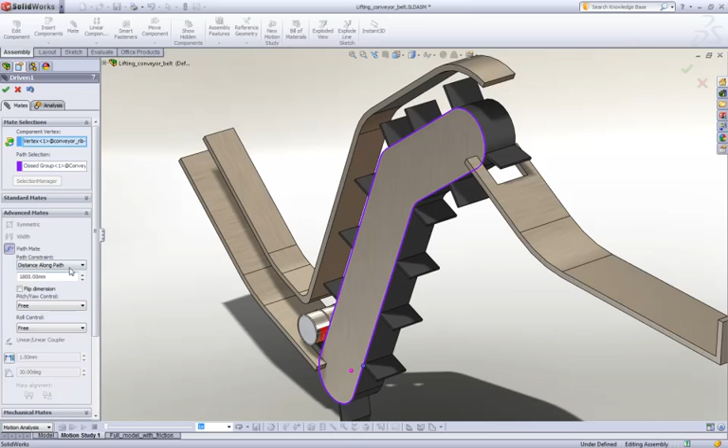New for Motion in 2011 is the ability to apply a motor to a pathmate. When we define a pathmate, we just use the distance along a path or percentage distance, and then we can drive that value using the motor. It's a very straightforward process. When you go to the motor option, you'll see you now have the pathmate option, and just select the mate that you want to drive.

In this instance, what we've done is we've applied a motor to every one of the ribs in this conveyor belt, so that we can then drive it around like a conveyor. And it's useful for other applications as well, such as overhead crane systems, to emulate chain type conveyors, or even things like roller coasters. So it's a very powerful tool, and it gets around the limitation of not being able to enforce a motor in more than one direction. So let's take a look at how this works.

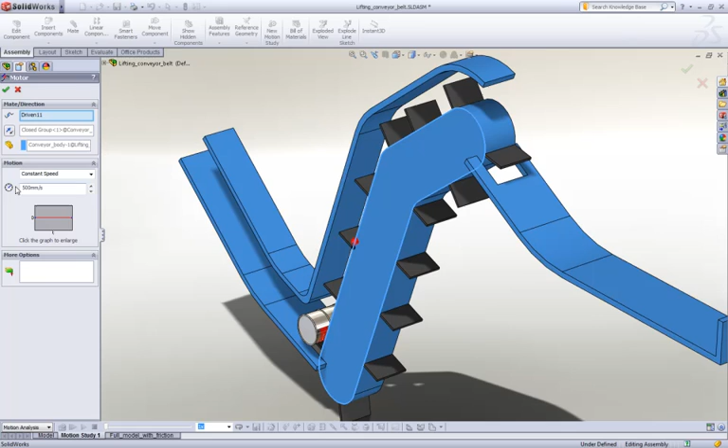In this case, just to quickly show you, all we're doing is we're driving these ribs at a fixed speed representing the conveyor speed. But obviously it will work with event-based simulation as well, so you can do event-based motion. All we have set up here is some contact between this barrel and the belts, as well as the outer frame. So it just takes a second to rebuild, and away we go.

And the reason it works so quickly is because it's all kinematic aside from the contact. So there's not that much overhead to actually using pathmate motors. So it will help you do things a lot more efficiently. You can see in here we've actually got a little bit of friction, so you can see the barrels spin around as it rolls along the conveyor system.

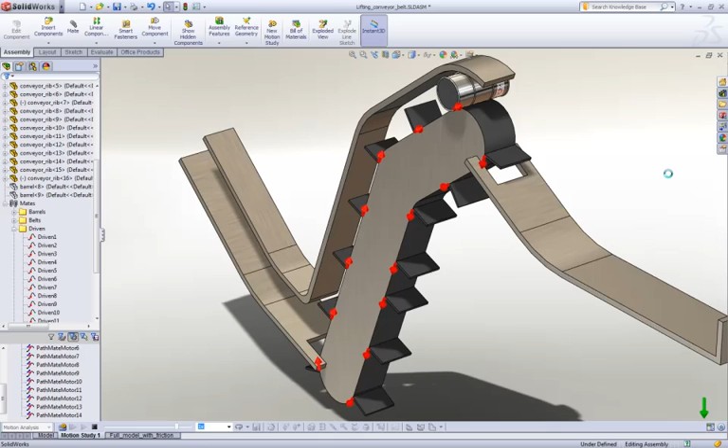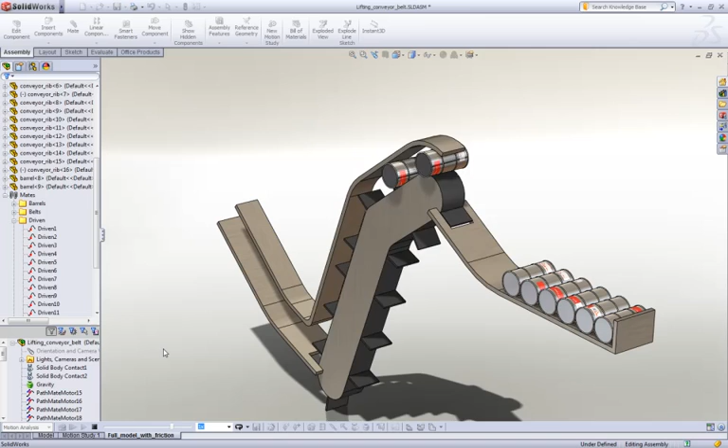And there we go. So we can just play that real time. So you can see, very nice looking. And we can take that a step further by providing a whole series of barrels and see what that overall resulting motion looks like. So again, it's going to be great for machine designers or people who want to study the operation of conveyors, cranes, roller coasters, whatever. It's a great new enhancement to the motors in 2011.

Another area of improvement in 2011 is with how we define movement of our systems, whether it's through motors or forces. And that's a new and improved motion function builder. In this case, what we're doing is we've got a packaging system. We're going to do a pick and place operation to put these shrink wrap towels into the cardboard boxes. What we're going to do is just focus on the timing of the move over. We want to shift the package over once it's raised from 0.5 to 1.5 seconds.

I've already got a function set up, but let's look at how we go about creating one of those. We have our built-in system of functions such as constant speed, distance, oscillating, and so on. But we now have the ability to create our own custom functions, as you can see here. And you can either save those or load them from file, and we can create new ones. So you can see we have our regular types, such as bringing in data point functions.

The function expression has been greatly improved, where we now have immediate access to all of the available functions in the list over here. So if you want to use any of them, just select the function and then fill in the blanks, and it will actually graph those for you as well. We also see access to the variables and constants. Something new in 2011 is support for cycle angle.

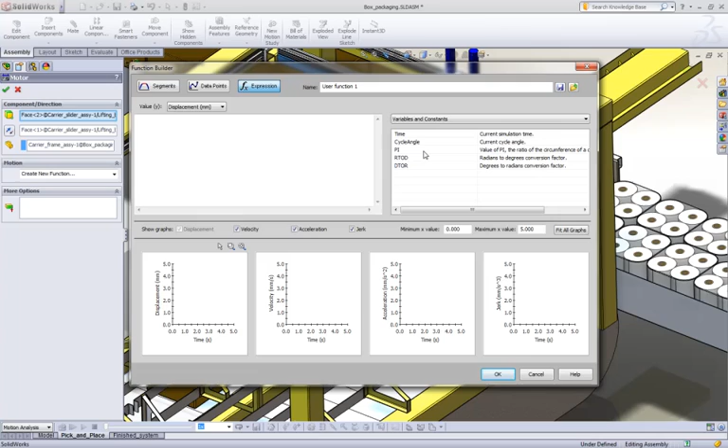So if you're in the machine design business and you've got a cycle time for your machine, you can actually set it up and work out everything based on a cycle time, and just adjust the cycle time for everything to scale the timing and movement of the parts. Very powerful tool for machine builders. Alright, but the most important one we want to talk about is segments. And really the changes that have come have really been driven by customers, and with that the way they want to define functions, which is to build up ramps, dwells, and so on.

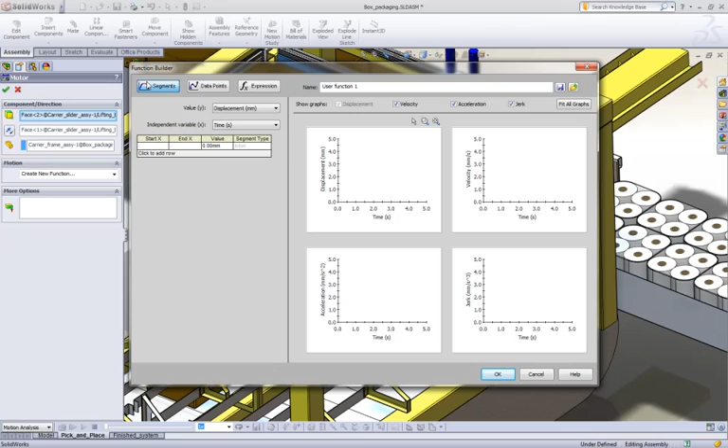So let's take a look at how we do our transition across. So like I said, we want to push it over from 0.5 to 1.5, hold it over at the other side from 1.5 to 2.5 seconds, and then bring it back from 2.5 to 3.5 seconds. So the first step to do that is from 0 to 0.5 seconds, keep it at 0. And again, we've got different interpolation options here, which again are customer driven based on how many functions they typically use.

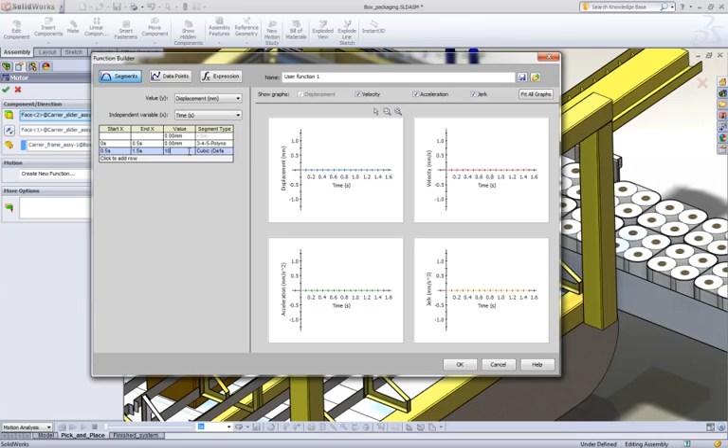But from 0.5 to 1.5 seconds, we want to move it across. So we're going to move the motor 190 millimeters. And again, we'll just set our interpolation. And this is where you can see the value of seeing the velocity, acceleration, and jerk profiles. And from 1.5 to 2.5, we're going to hold it there. So this is the dwell. And then finally, from 2.5 to 3.5, we're going to return back to 0.

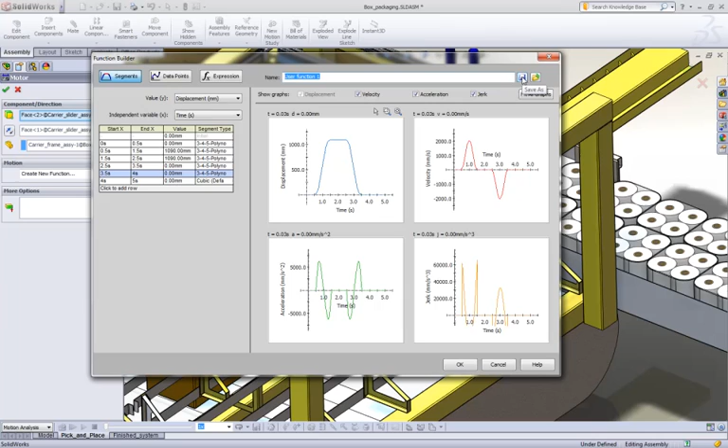And then from 3.5 to 4 seconds, which is the end time, we're just going to hold it down there. And again, as we said before, we see the velocity, acceleration, and jerk profiles for using that. And we can type in the name here, and like I said, we can either save or load it from a graph. You can control if you just want to see the displacement function. And you can zoom to fit, you can zoom to the area of the graph, and so on.

Alright, so let's take a look at how that works. Just click on calculate. So it picks it up and then it moves it across. And I've added a few mate controls to turn some mates off so it'll actually drop it in the box. So this also will work well with event-based systems as well, because you can build up some very nice functions.

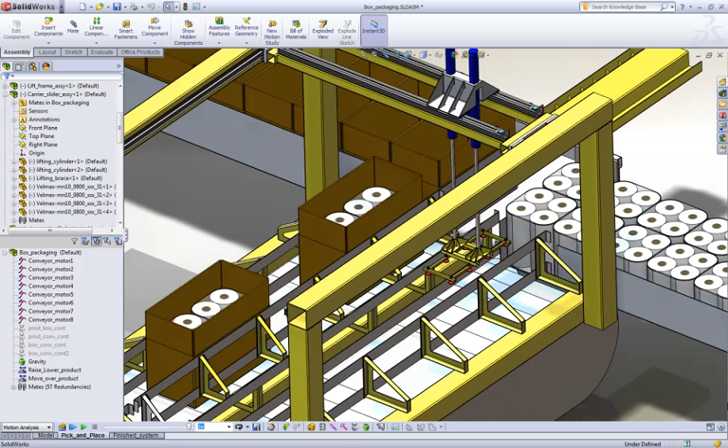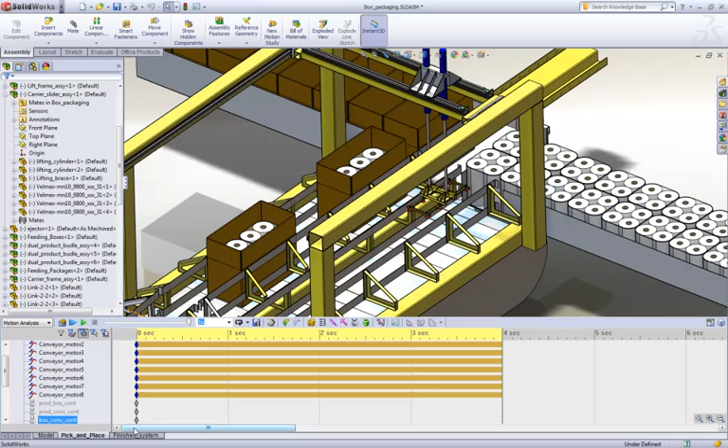And we can see here, we'll just fit the graph. You can see here's where we turn off the mates that hold the product. Now if we combine this approach with the pathmate motor which we just saw, we can do the whole system. So we can index the conveyors, pick up the product, move it across, drop it, and so on, and repeat the cycle.

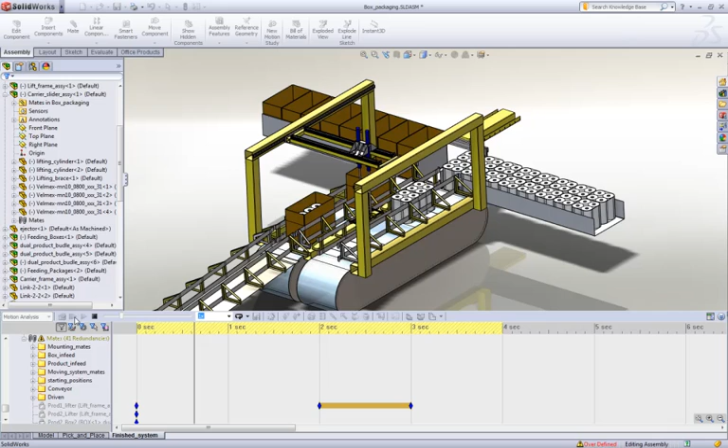So we really have improved the capabilities in 2011 for machine builders to get their jobs done, make it easier to do things, reuse information, and ensure the machines are going to work the first time.